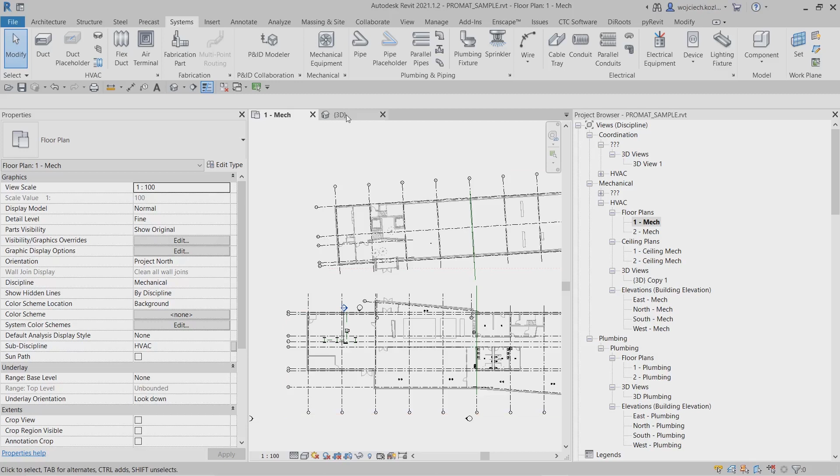In the next section of the film, I will present the process of modeling a part of the smoke exhaust system in a building using the Promat libraries. I currently have an open project that already contains a system component library. The easiest technique to transfer libraries from a Promat template is to copy the content and paste it into an existing project in one Revit session.

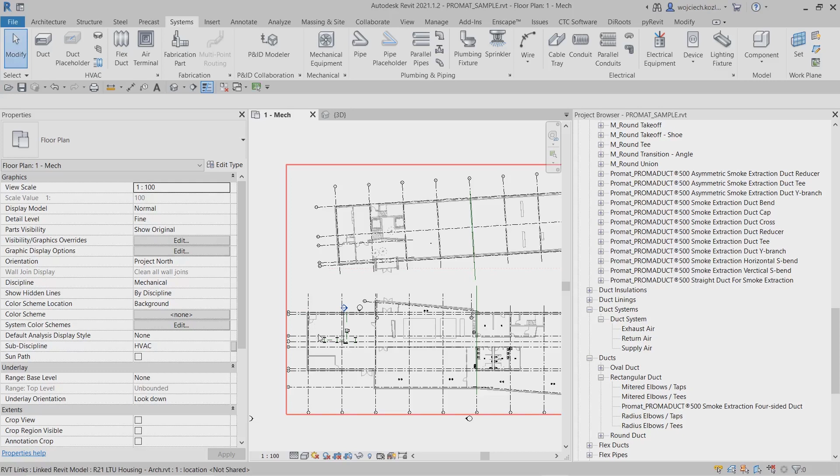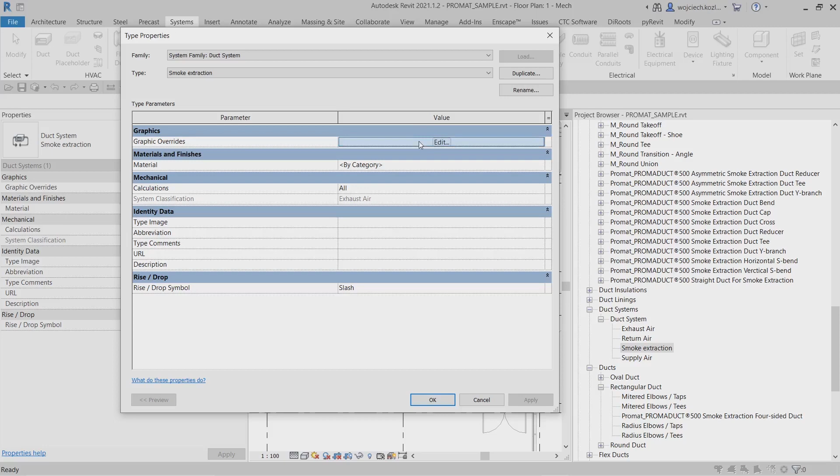We can start the modeling process from defining the requirements, for example, the amount of air removed in a given room. We can place grills or set up a device, for example, a fan. Each system in Revit should be properly classified, so it's worth creating it by copying the existing one. In this case, it is the exhaust air system. After copying the Promat libraries, the smoke extraction duct system is already available for use.

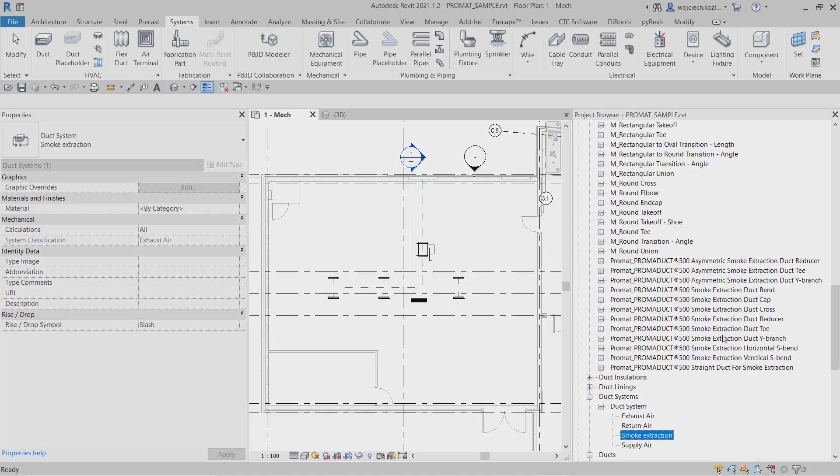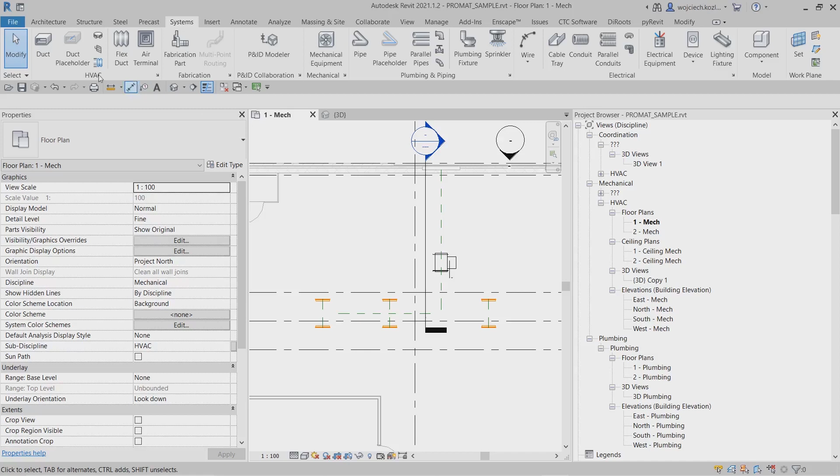If we have already placed air terminals and equipment, the first step is to create a virtual system linking elements in a group. In the next step, I will start by drawing a straight line segment with the Promat duct system. Before starting, we define the size of the duct as well as the elevation and the system type.

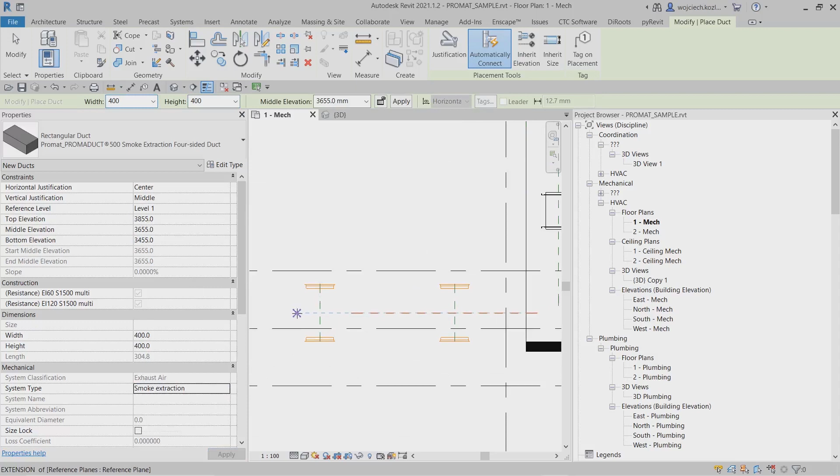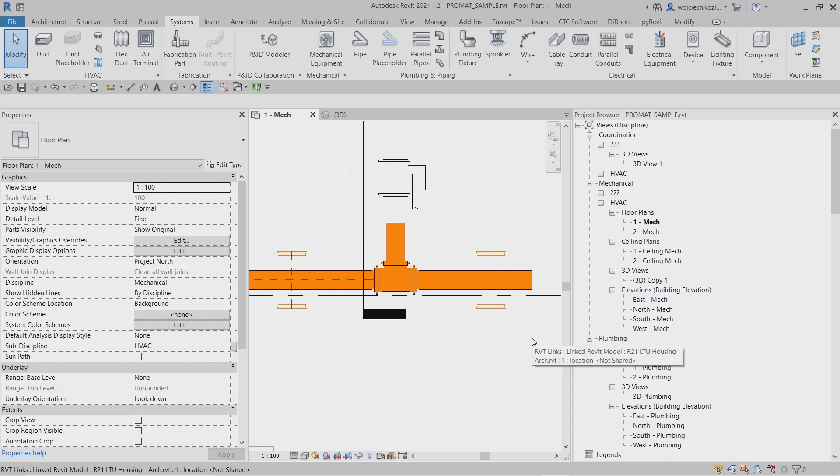Standard fittings are automatically created during the drawing of the ducts. The designer can modify the duct fitting using native Revit options. The elbow will automatically turn into a T. If you want to draw the duct further, it is enough to select the fitting and use the Quick Drawing option coming from the duct connector. Connectors that have predefined dimensions.

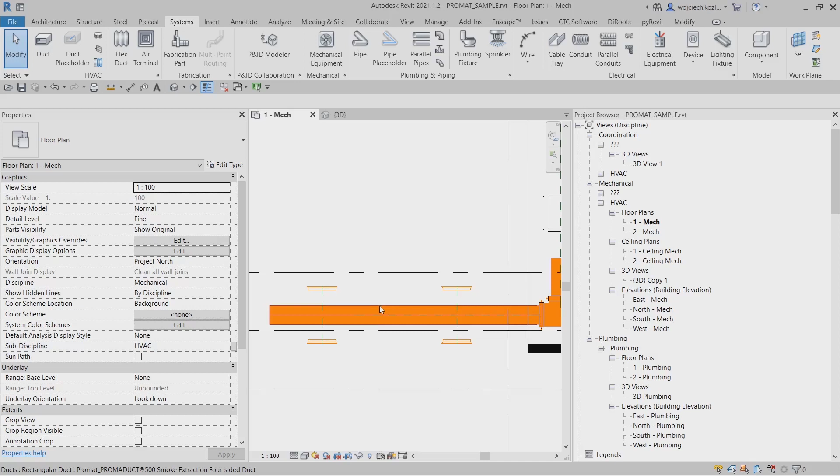In the next step, I want to draw a cross connection. In this case, you can draw two intersecting ducts, but this will work correctly only for standard cross fittings that have the same height on all outlets. In the case of the Promat cross fittings, it is also possible, but I think it is better to draw a T first and update it to a cross. Thanks to this, we control which connector is the main and which is secondary, with a different height.

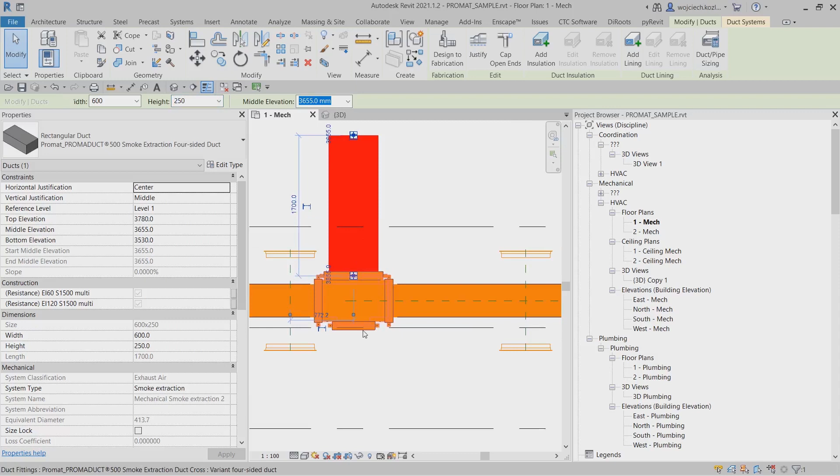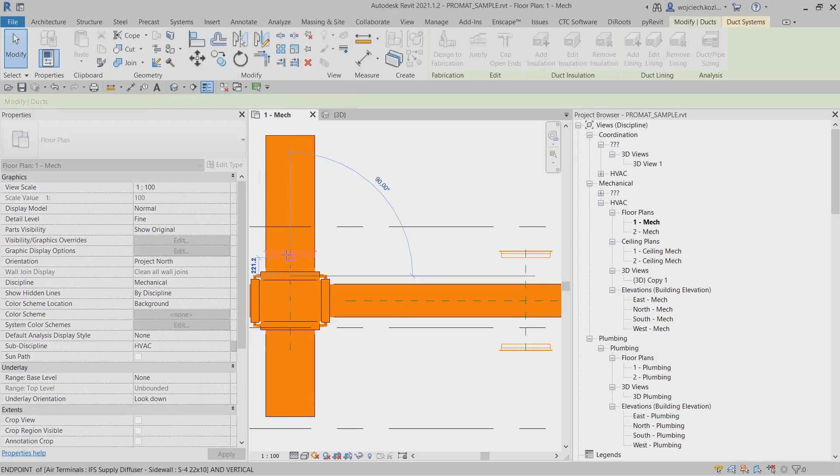After placing the cross fitting, you only need to draw the connections between the grills. Such a configured connection can be copied to another similar place. In the case of copying, you will often need to break the duct into smaller parts or delete and redraw it. I will finish the rest of the places in the same way.

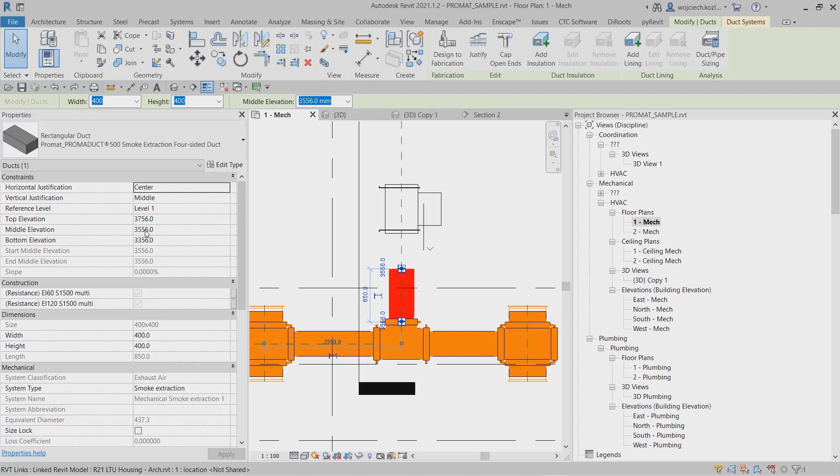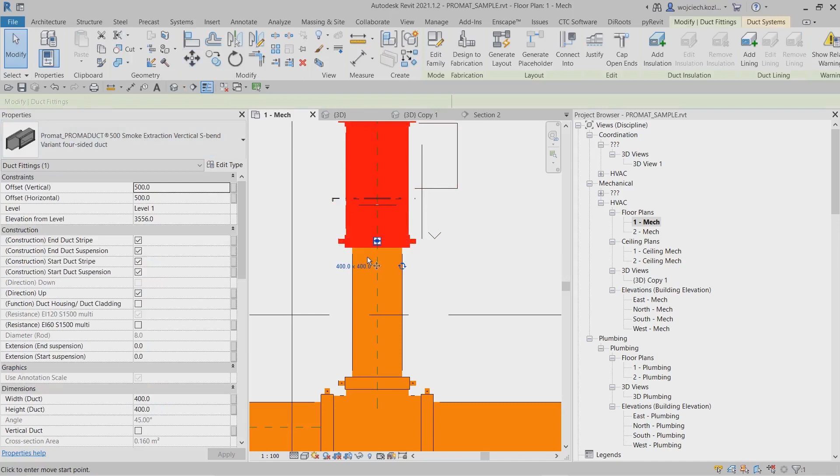Let's move on to a non-standard fitting. In this example, the axis of the duct is not on the same elevation as the fan. Therefore, I will use a vertical offset. First, non-standard elements should be placed on the existing duct and then adjusted to the project using parameters. In order to see how far I move away from the duct, I will create a section view and measure the distance. Then, I will set this value into the Promat family using the dedicated parameter called offset.

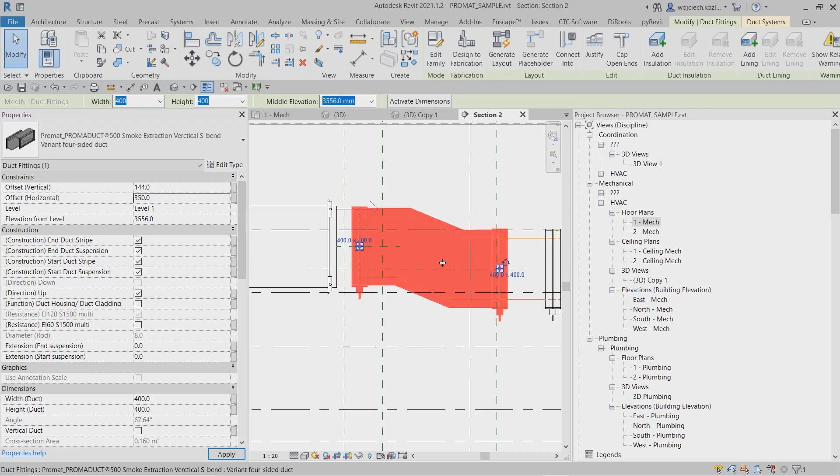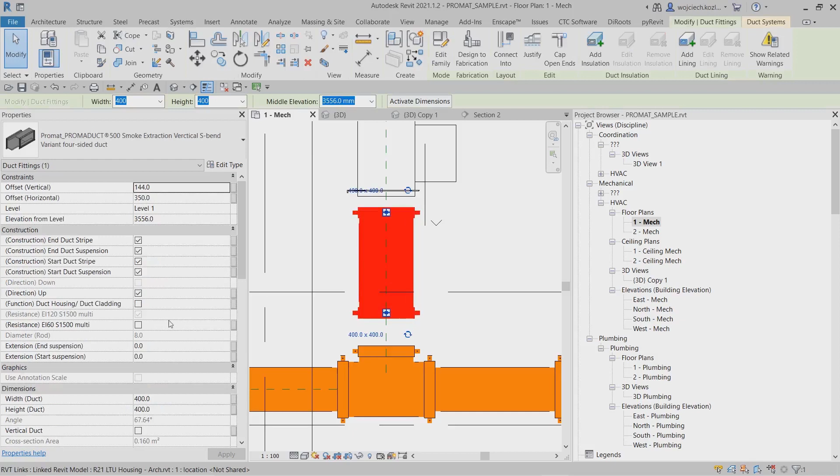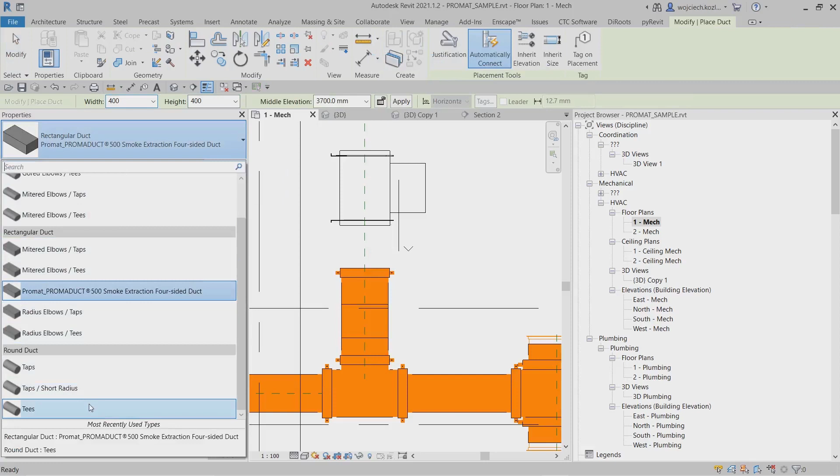The user can also connect the fittings with each other to optimize the design. I remove the straight duct segment, turn off the unnecessary stripes and suspensions, and finally grab the connector and move it to the T-fitting connector. Finally, I need to connect to a device that has a round connector. In this case, I will use the Revit general family Multi-Shape Transition.

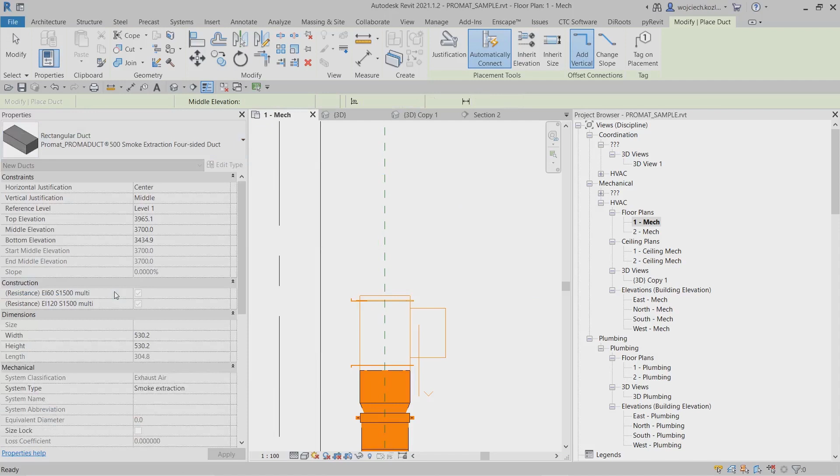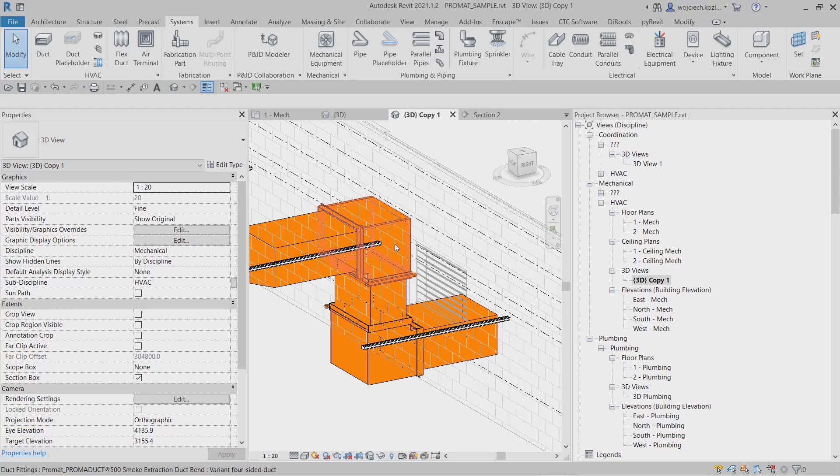Moving on, I start modeling from the device to the grill mounted in the wall. I start again with a rectangular duct with dimensions, for example, 1600. I go down to the lower elevation by entering it in the option bar. As you can see, Revit has created an automatic connection consisting of two elbows and a vertical segment. Finally, I have to adjust to the grill by changing the size of the duct.

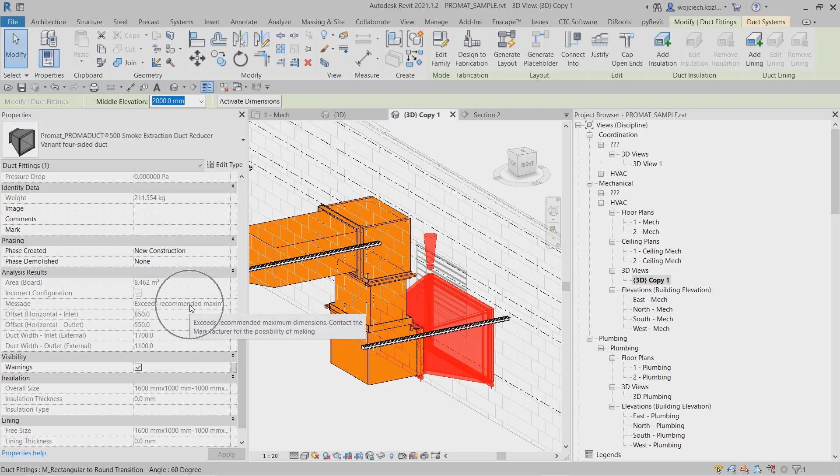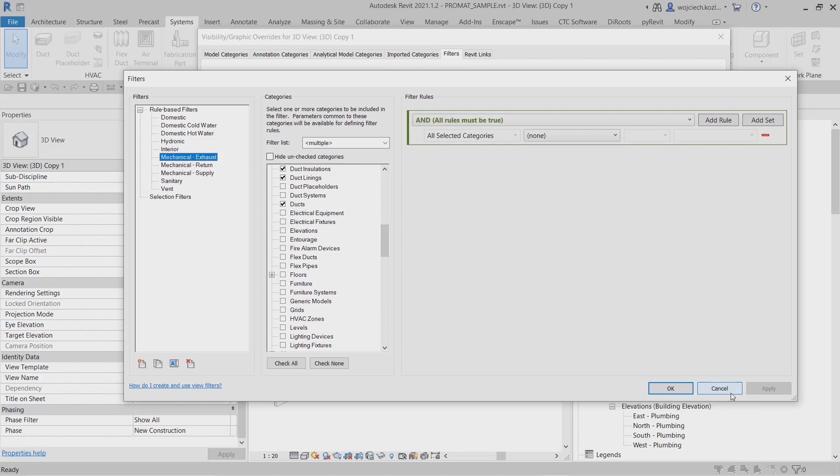To present the smoke exhaust system well, we can also create a filter that we place on the view. This filter applies to the smoke exhaust system, and the rule applies to the type of this system. I set the color for the system using graphic overrides.

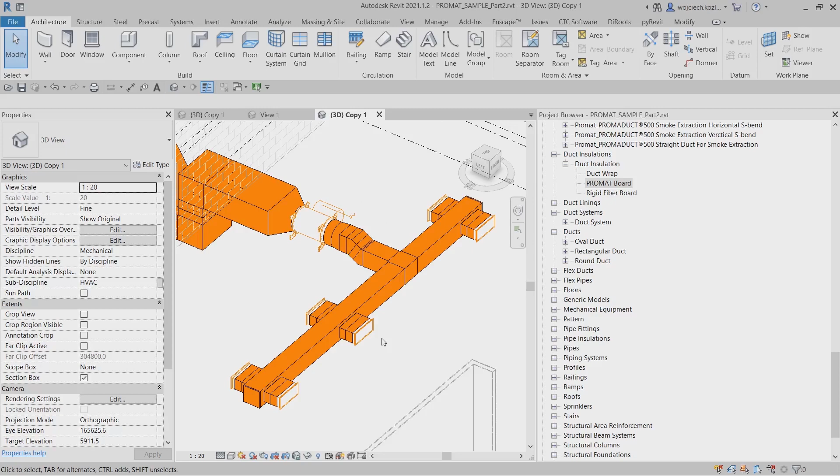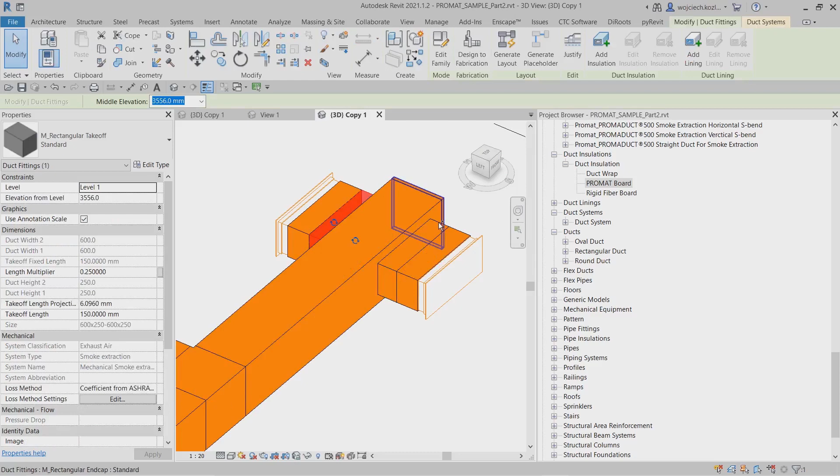Another scenario that may appear in the design process is to replace existing ducts with the Promat system duct. As we can see from the example, the duct system was designed with general fittings. First, analyze the existing ductwork and disconnect it in non-standard places. In this case, the ducts are connected by takeoffs, so we also remove them. In place of the takeoffs, we will insert crosses.

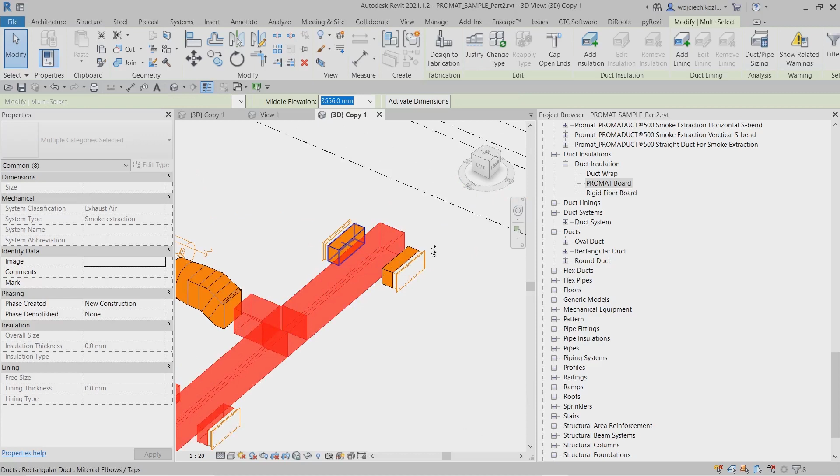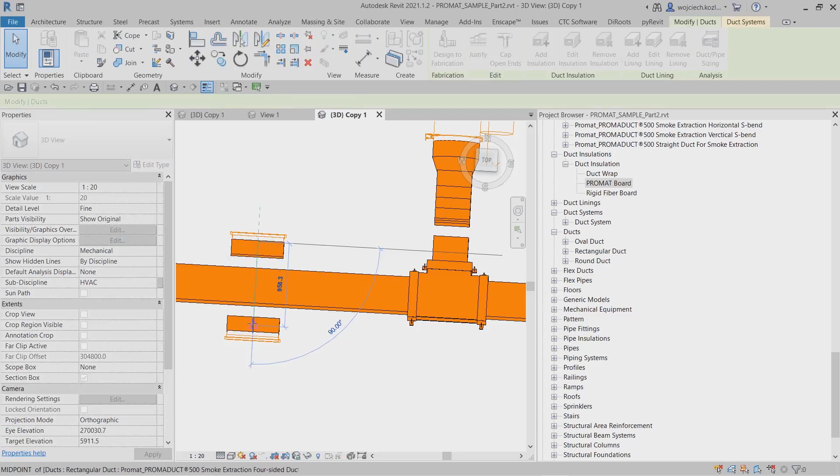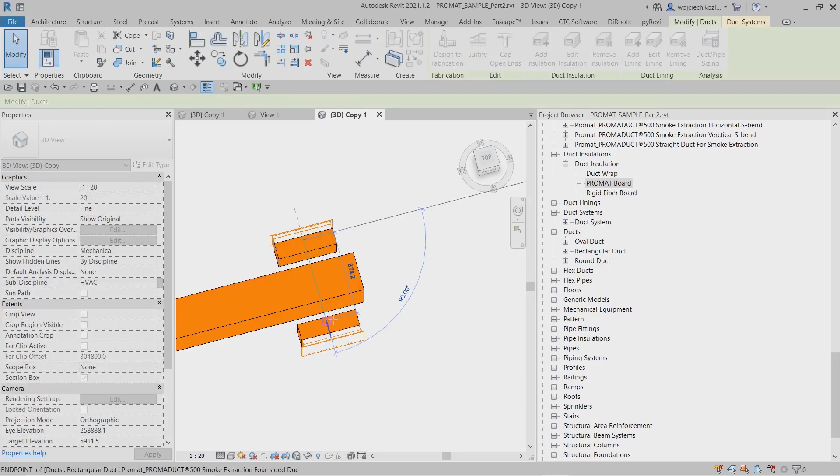An important step is to change the run type to the Promat duct system. At the end, we should correct the places where the crosses are to appear. A system message may appear during the conversion regarding the removal of ducts that are too short. We finish the ductwork by automatically closing the crosses.